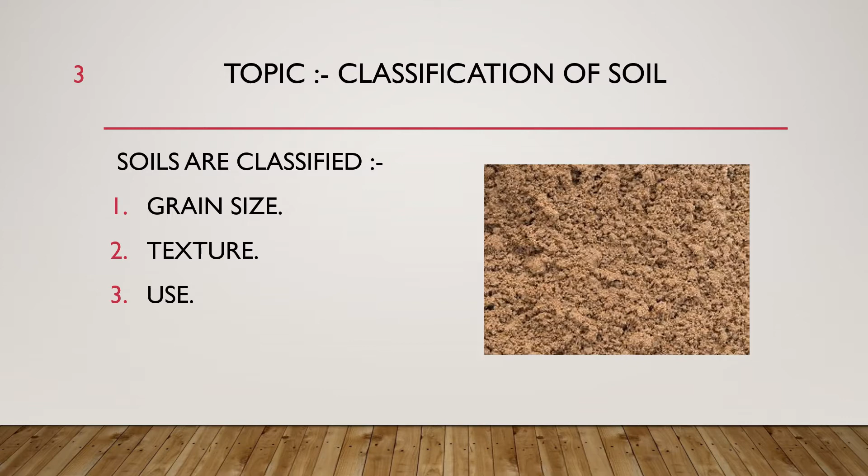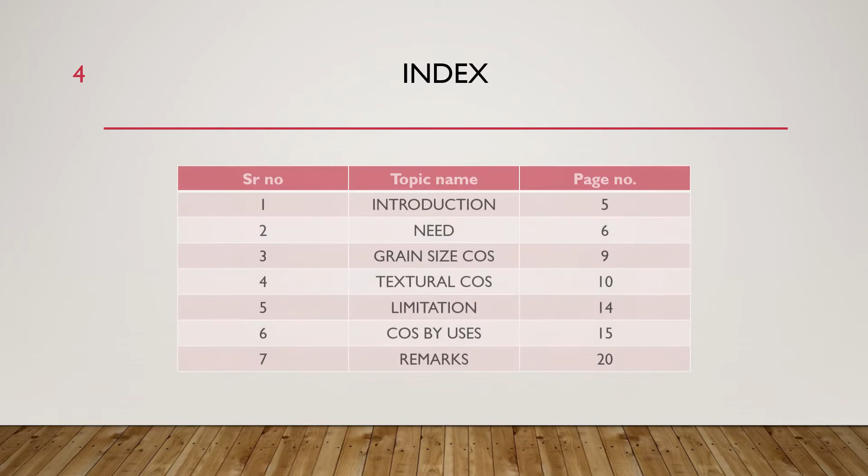Before we go into detail, let's see the index of our PPT: introduction, then needs, then the first type of classification of soil, that is grain size classification. Then the second type, textural classification of soil, then their limitations. Then the third type, classification of soil by uses, and then their remarks.

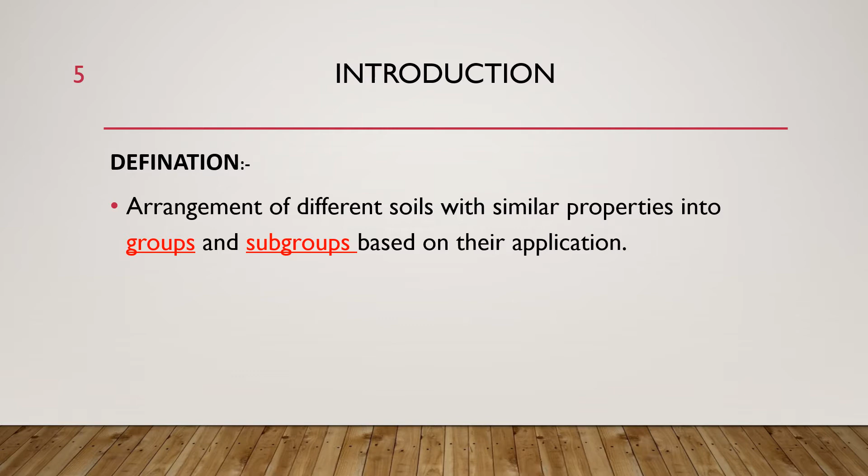So we start our presentation with the introduction. What is the definition of classification of soil? The arrangement of different soils with similar properties into groups and subgroups based on their classification applications is called classification of soil. A number of classification systems have been proposed since the first quarter of the twentieth century.

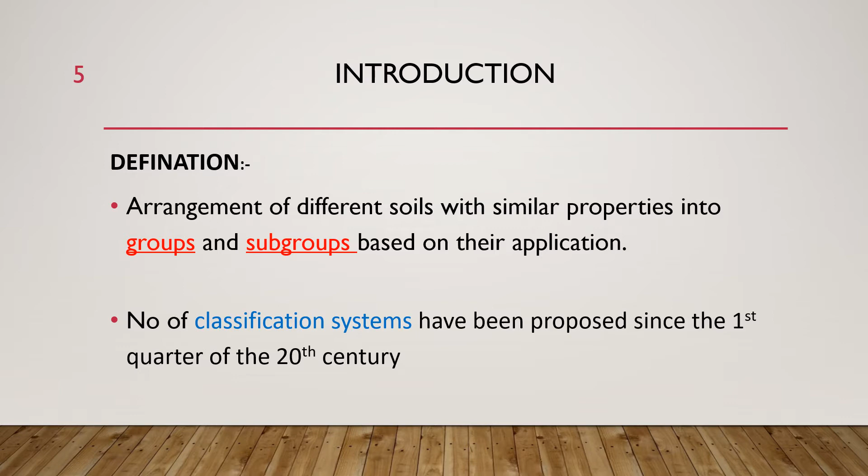Now we move to the need of classification of soil. First, a classification system represents, in effect, a language of communication between engineers. Communication becomes easier and more clearly understandable for engineers.

Second, it enables one to use the engineering experience of others. And third, which is very important, by knowing the soil classification, the engineer already has a fairly good and general idea of the way the soil will behave.

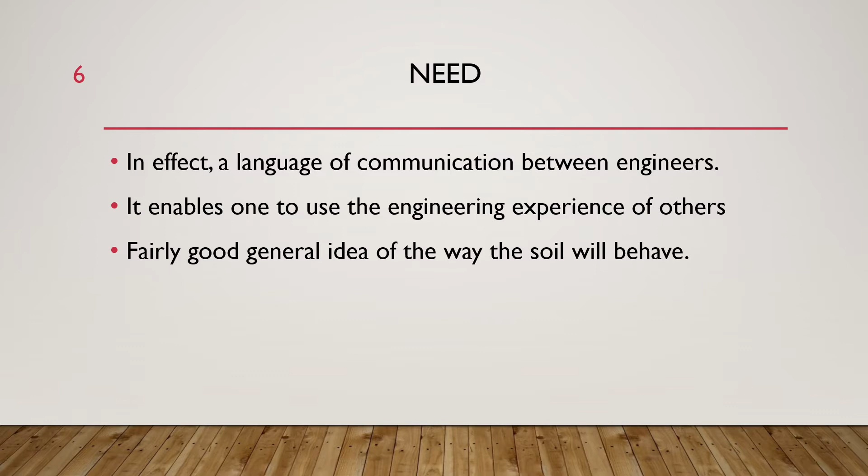We move to the first type of soil classification, that is grain size classification. Grain size classification depends on the size of soil. Basically, soil sizes are classified into four types: gravel soil, sand soil, silt soil, and clay soil.

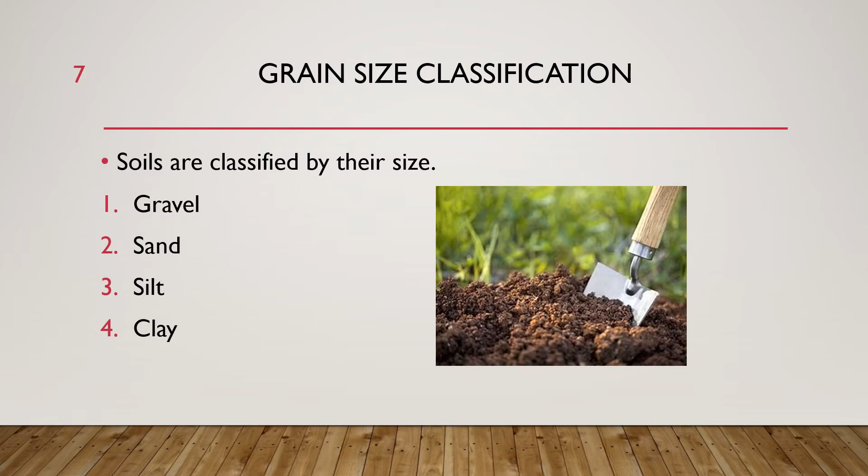There are four organizations having different limitations for different soil sizes. First is the Massachusetts Institute of Technology, that is MIT, US Department of Agriculture, that is USDA, American Association of State Highway and Transport Officials, that is AASHTO, and Unified Soil Classification System.

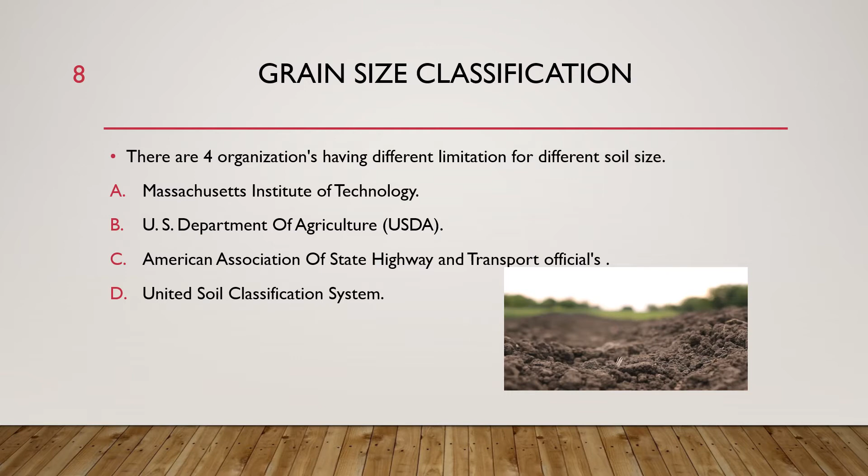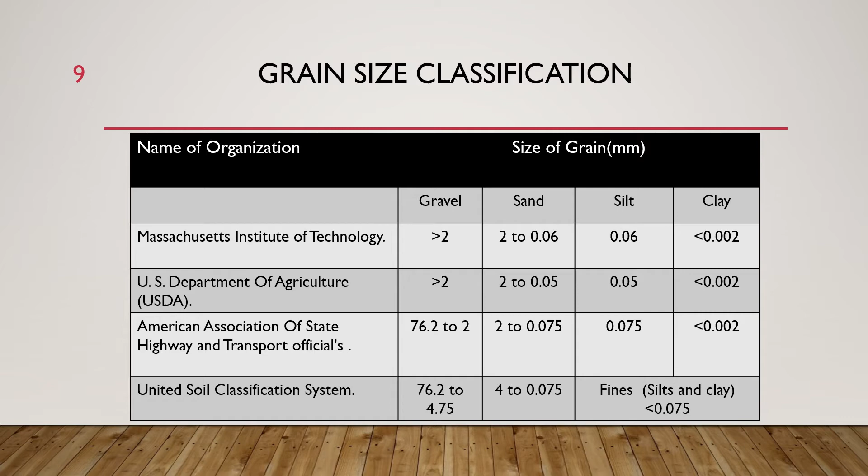And the Unified Soil Classification System gives 76.2 to 4.75 mm for gravel, 4.75 to 0.075 mm for sand, and less than 0.075 mm for fine soil - you see, it is the same for both silt and clay.

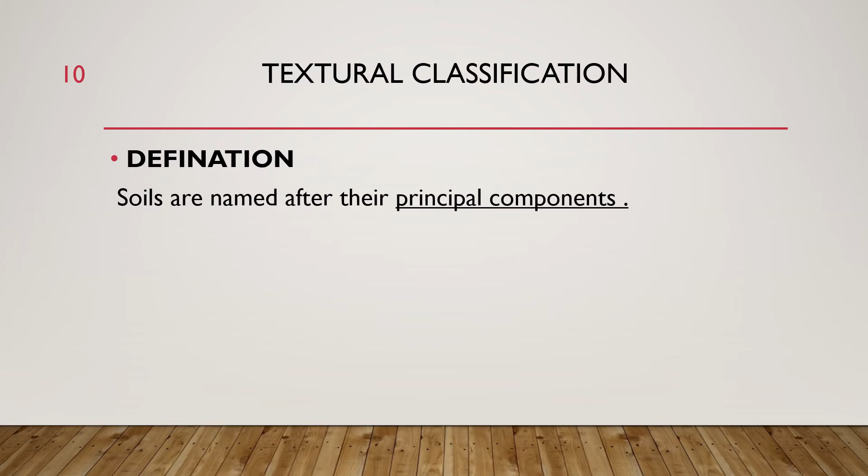Now I move towards the next type of soil classification, that is textural classification. We start with its definition: soils are named after their principal components which are present in the soil sample, this is called textural classification of soil.

Some general terms are coarse textured, medium textured, and fine textured. What is coarse textured? The mixture of large soil plus small soil is called coarse textured. Medium textured means only small soil is present, and fine textured means only fine grained soil is present.

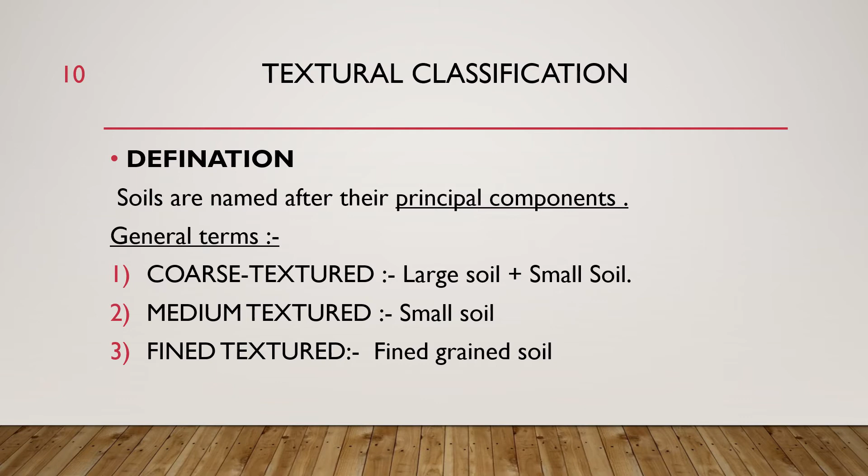Textural classification refers to USDA, that is US Department of Agriculture, and for finding the texture of the soil sample, we need to solve a numerical with the help of this diagram. How this diagram helps to solve the numerical and get the real texture of soil, we will see in the next slide.

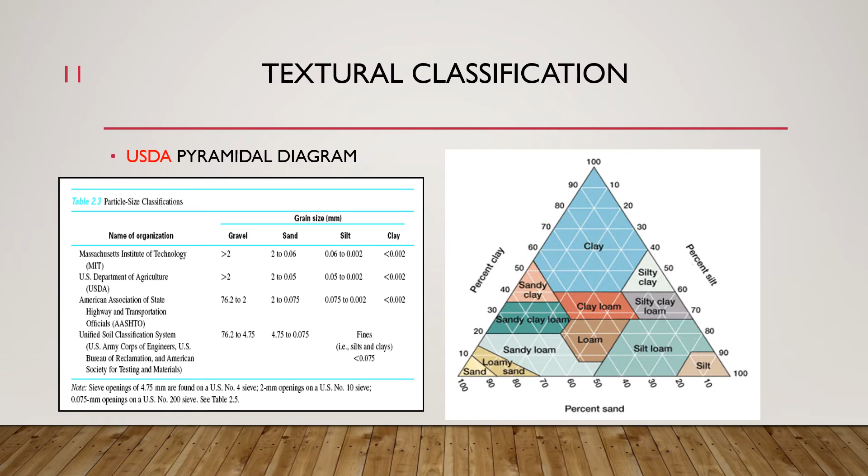For getting the texture of a soil sample, we need to solve a numerical which I explained earlier. For that there are some steps to solve this numerical. First, find the amount of different soil in the sample. Second, draw it on the USDA pyramidal graph which I showed in the before slide. And third, find the portion where the intersection point lies.

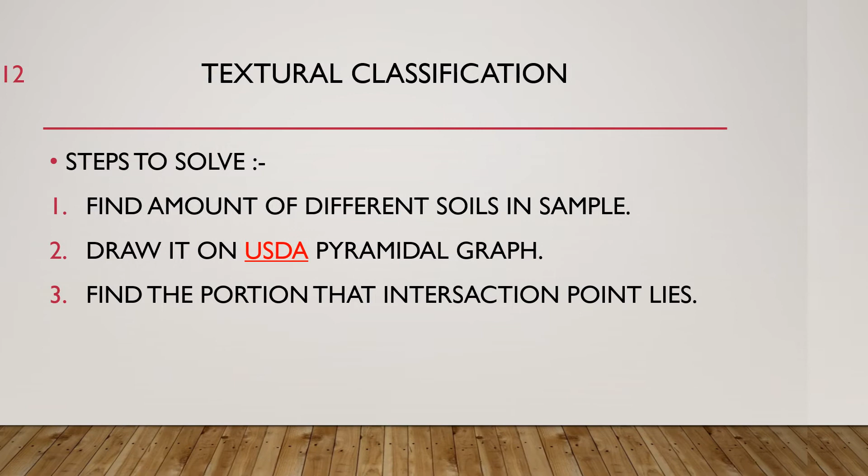So how do we solve these numericals? We see it by one example.

We see one example of how to solve the texture of a soil sample. First step is to find the amount of different soil types in the soil sample.

Here we take different percentages of soil: gravel 11%, sand 56%, silt 21%, and clay 12%. In these percentages we took...

...the first two greater percentages, that is sand 56% and silt 21%, and we put these percentages on our triangular diagram. First we put 56% of sand on the sand side, and then 21% of silt on the silt side, getting one intersection point which lies in the sandy clay loam region. So by this numerical we know that the soil sample is a sandy clay loam type of soil.

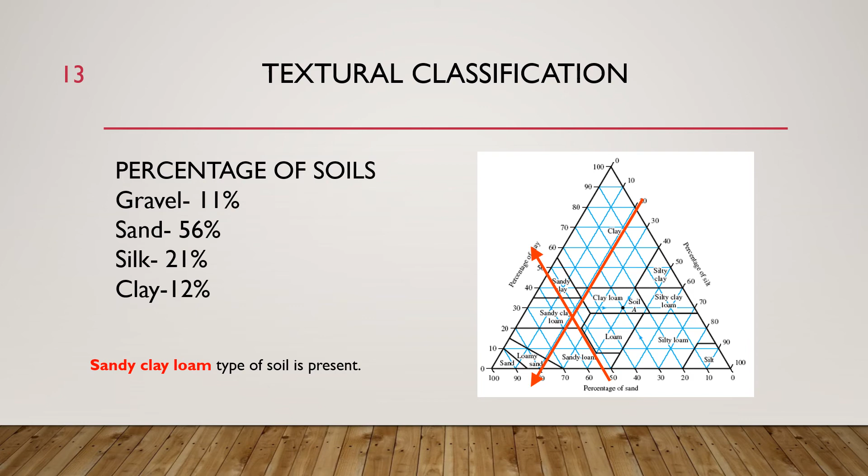There are some limitations of the texture classification system. First, it does not consider plasticity, meaning it is based entirely on particle size distribution and does not account for plasticity, which to a great extent influences the physical properties of soil. Because the texture classification system does not take plasticity into account, it is not a totally reliable indication for most engineering purposes. Second, the two elaborate systems used at present are AASHTO and USCS.

Both systems take into account particle size distribution and plasticity. The AASHTO classification system is used mostly by highway departments. That is the third point - the AASHTO classification system is used mostly by highway departments for making highways.

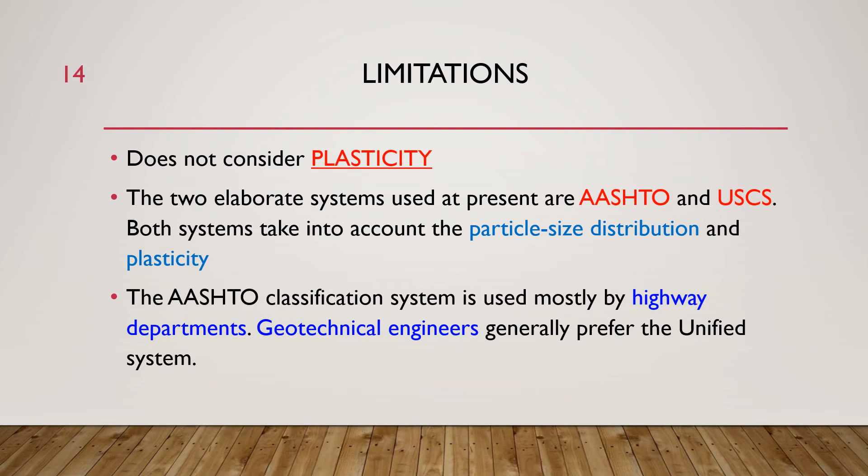One of the important and last types of soil classification is classification by use. This refers to the AASHTO classification system, which is an acronym for American Association of State Highway and Transportation Officials. It was developed in 1920 by the US Bureau of Public Roads for the classification of soil for highway subgrade use.

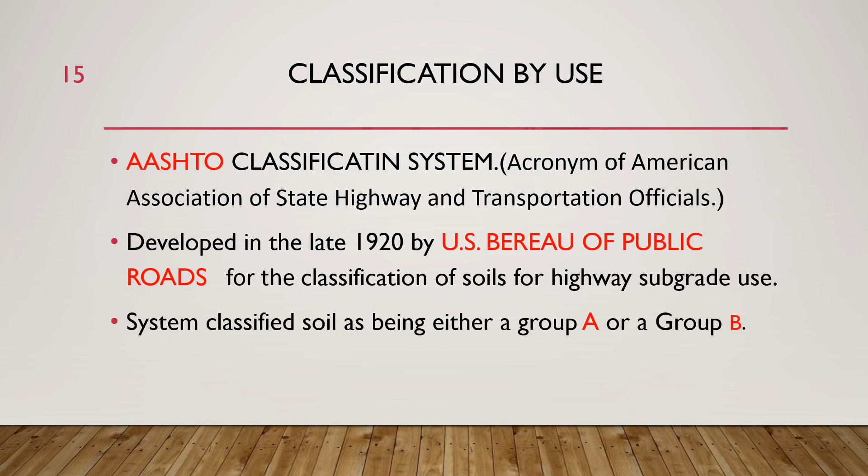This system classifies soils into group A or group B. Group A is made to maintain pavement at all locations, but group B does not maintain pavement at all locations. By this, group B is deleted and group A remains.

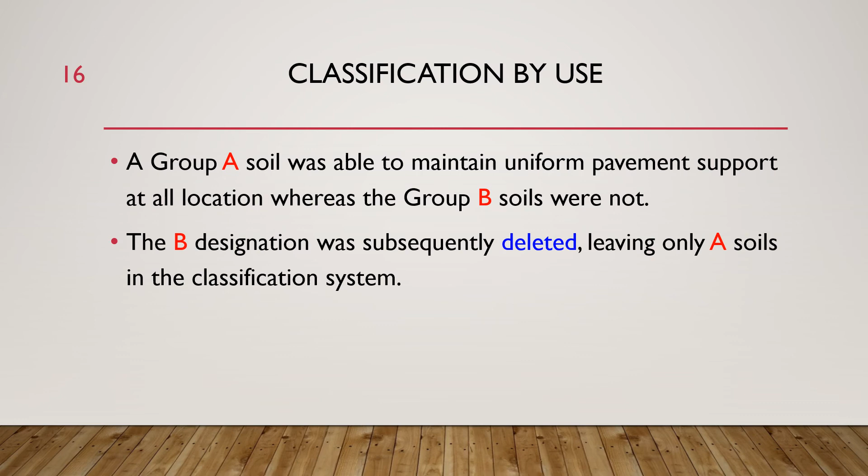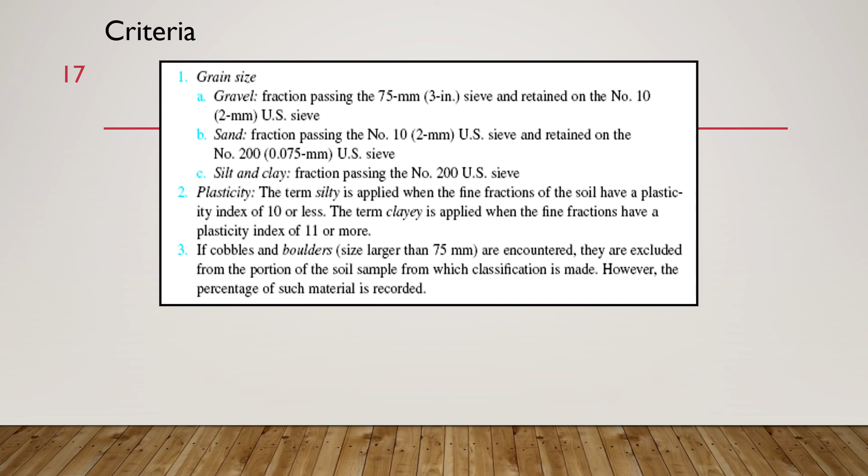For this, we require some tests: grain size analysis, liquid limit, and plastic limit.

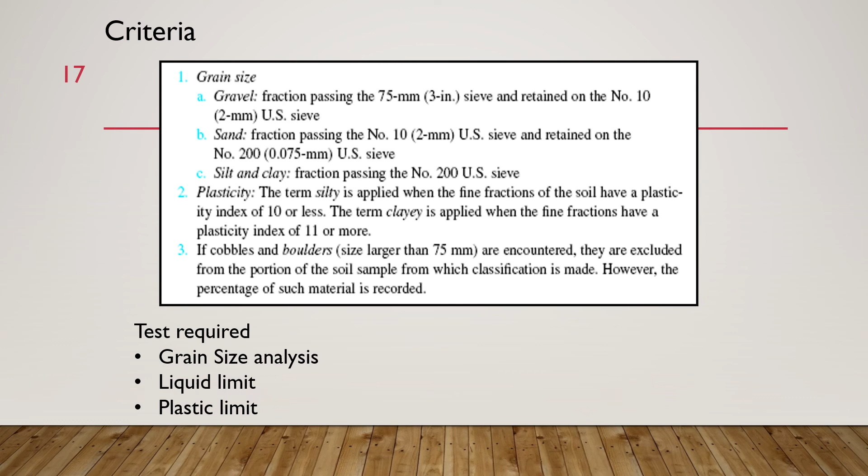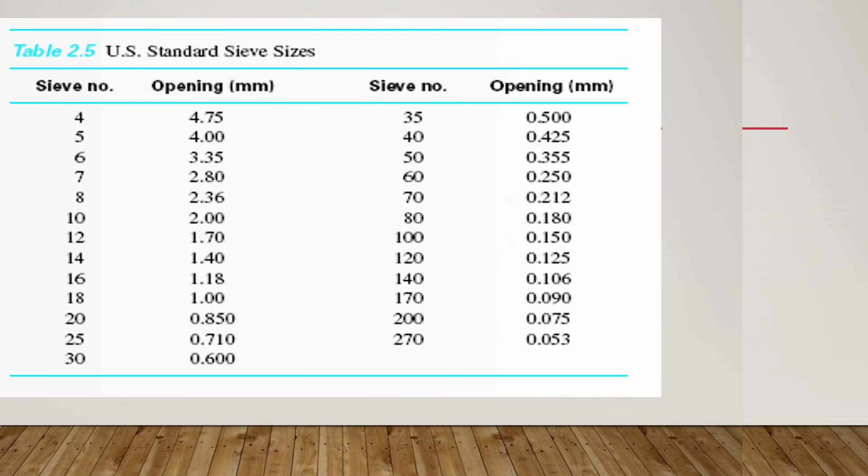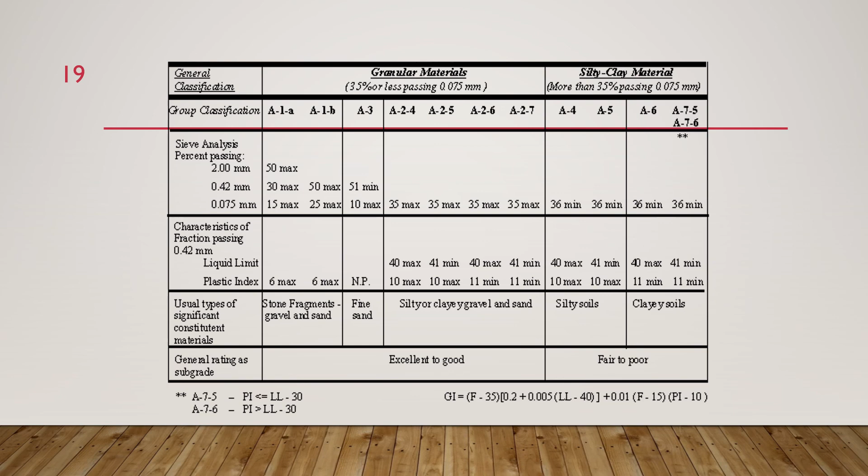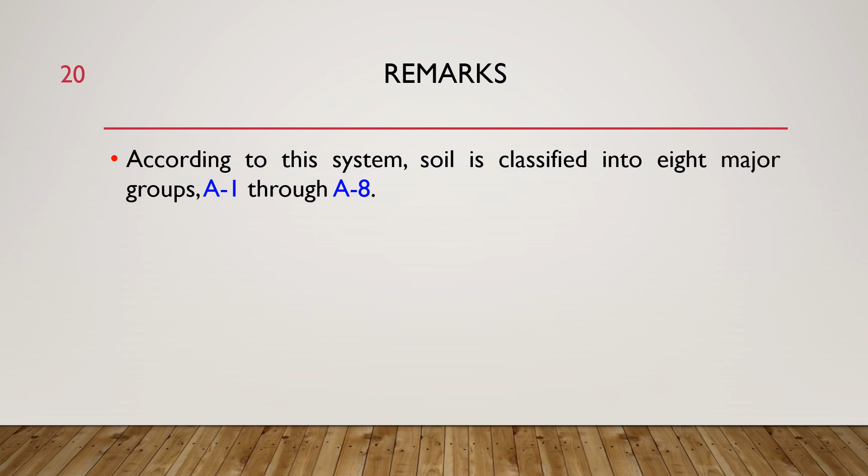Now for some remarks: according to this system, soil is classified into 8 major groups, A1 to A8. Soil group A8 is peat, meaning it is very organic and watery, considered an organic material.

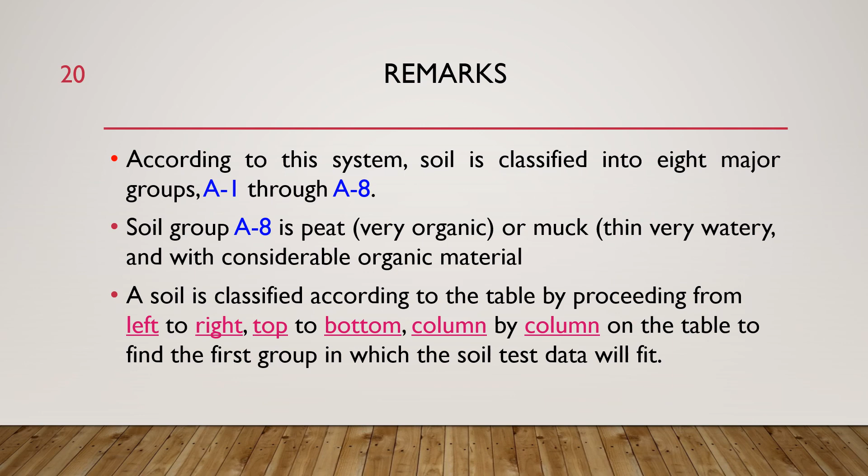Soil is classified according to the table by proceeding from left to right and top to bottom, column by column, to find the first group in which the soil test data will fit. The first group from the left into which the test data fits is the correct classification. The classification process stops at this point, regardless of whether another column further to the right could also qualify.